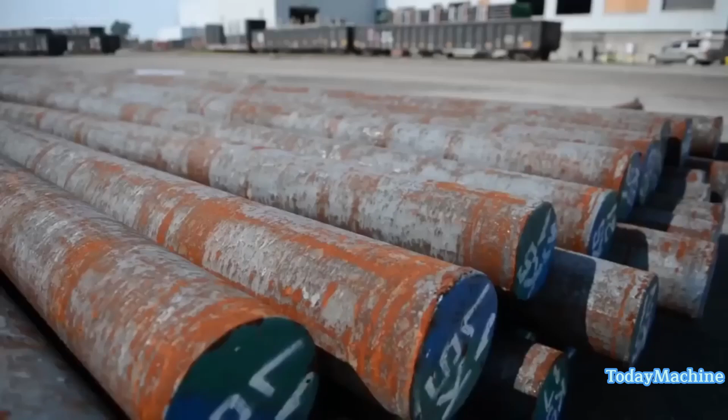The seamless manufacturing process begins with a solid steel bar that is carefully selected based on its chemical composition and desired grade of pipe. The steel bar is cut into smaller sections called billets, which are then cut into specific lengths depending on the desired dimensions of the finished pipe.

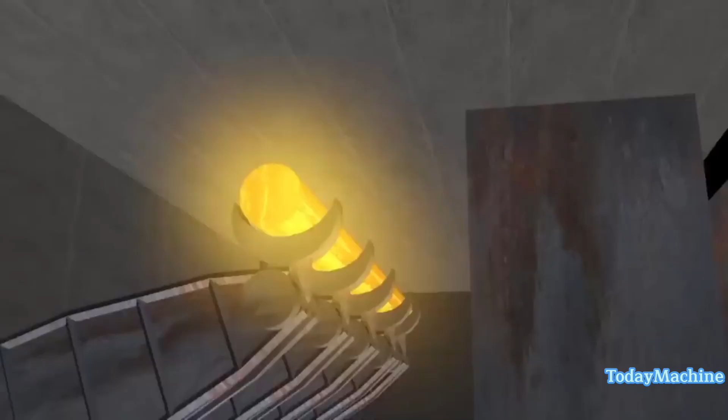The billets are transferred one at a time to a rotary hearth furnace, where they are heated to approximately 1,300 degrees Celsius. The furnace floor rotates clockwise, ensuring uniform heating of the billets. Once heated, the billets are removed from the furnace and transported to the rotary piercer.

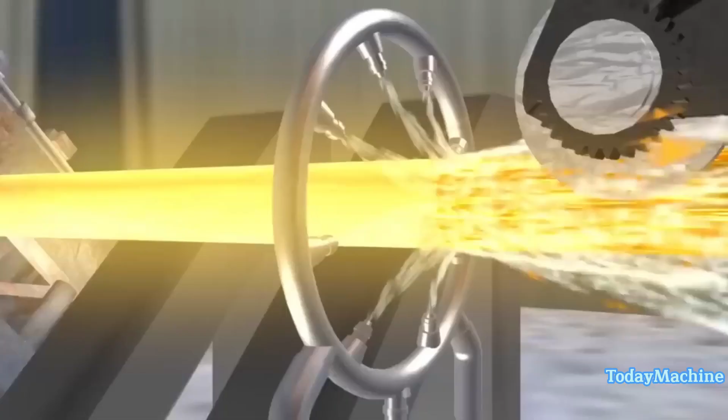At the rotary piercer, the solid round heated billet is converted into a hollow shell by cross-rolling over a high alloy piercing point. This cross-rolling action generates alternating tension and compression forces in the core of the billet, creating a void in the center as it comes into contact with the piercer point.

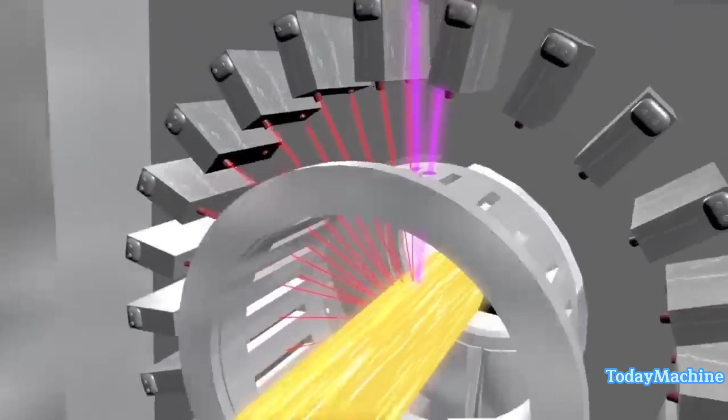The hollow shell formed at the piercer has a wall thickness that is further reduced to the final tolerance by longitudinal rolling on the retained mandrel mill. The outside diameter is rolled down by a series of 7 reduction stands using a chrome-plated tool steel mandrel. This reduction in diameter converts the heavy wall thickness of the piercer hollow into length as it passes through the mill.

After passing through the mill, a mill extractor decreases the tube's outside diameter further as it extracts the tube while the mandrel is withdrawn. The pipe then enters a wall thickness gauge, where it is scanned by 24 laser beams and 9 separate radiographic beams. These measurements provide precise outer diameter and wall thickness measurements over the length of the pipe.

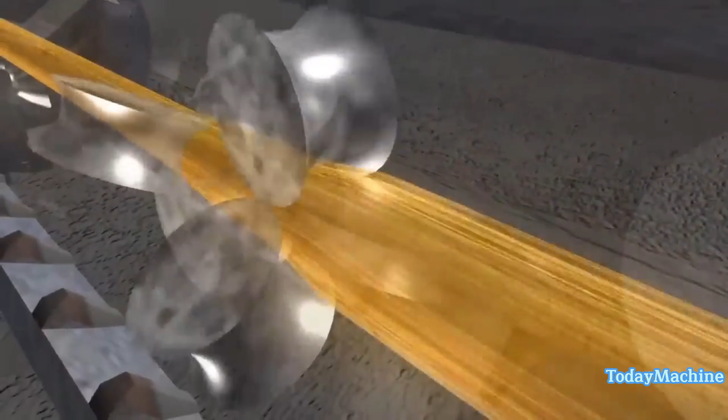The tube is then transferred to a walking beam reheat furnace for reheating before it proceeds to the stretch reducing mill. The final outside dimension of the tube is calibrated on a 22 stand mill, where 3 rolls in each stand carefully stretch the tube to create the final outside diameter.

The hot-rolled tube is discharged onto a cooling bed, where samples are cut and sent to the on-site lab for testing. Individual pipes are cooled to ambient temperature before their ends are cropped at the mill's cold saws. The pipes are then transported to the heat treatment line for quenching and tempering.

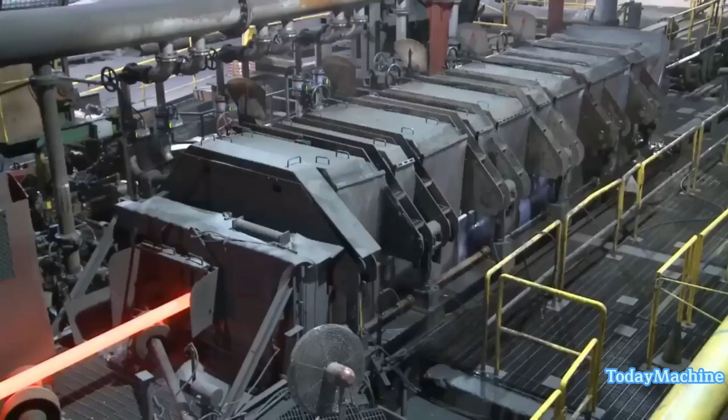In the heat treatment line, the pipes are heated to 870 degrees Celsius in a walking beam preheat and quench furnace. After reheating, the pipes pass through a water spray quench unit consisting of 7 spray quench heads with 800 individual water nozzles. The high-pressure water evenly applies the quench to the rotating pipe.

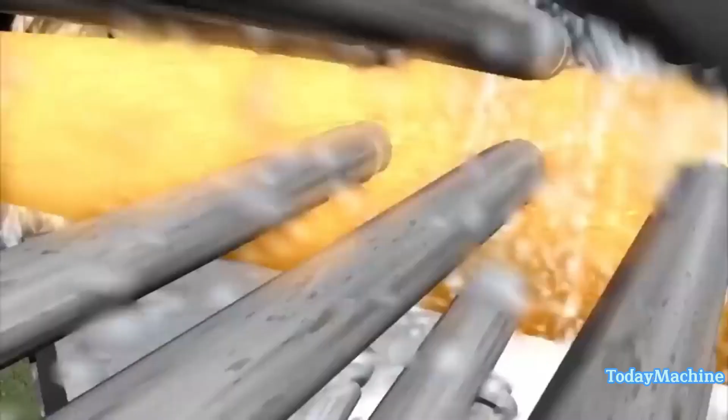Next, the pipe is transferred to a tempering furnace where it is preheated to 510 degrees Celsius and slowly cooled. This tempering process increases the pipe's ductility or toughness. Precise control of time and temperature during tempering is critical to achieving well-balanced mechanical properties in the finished pipe.

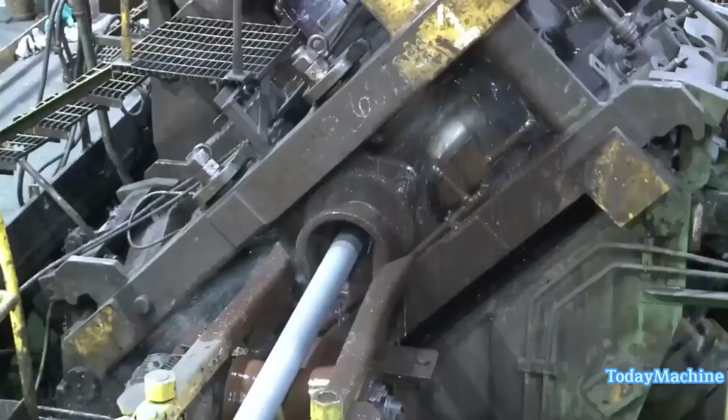After quenching and tempering, the pipe passes through a 3-stand resizing mill that calibrates the outside diameter to final tolerances. The pipe is then straightened on a rotary straightener while still hot. Samples are taken for testing of physical properties before the heat-treated and tempered pipe is transferred to a cooling bed and cooled to ambient temperature.

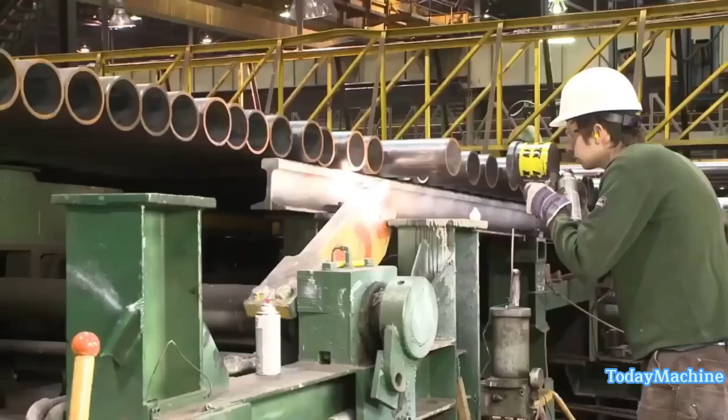The finishing process is a crucial step in the seamless steel production process. It involves various steps to ensure the pipe's dimensional accuracy, surface finish, and overall quality. First, the hollow shell formed at the piercer is further processed to reduce its wall thickness to the final tolerance. This is achieved through longitudinal extrusion on the retained mandrel mill.

The pipe's outside diameter is rolled down using a series of reduction stands equipped with chrome-plated tool steel mandrels. These reduction stands gradually decrease the pipe's diameter, converting the heavy wall thickness of the piercer hollow into length.

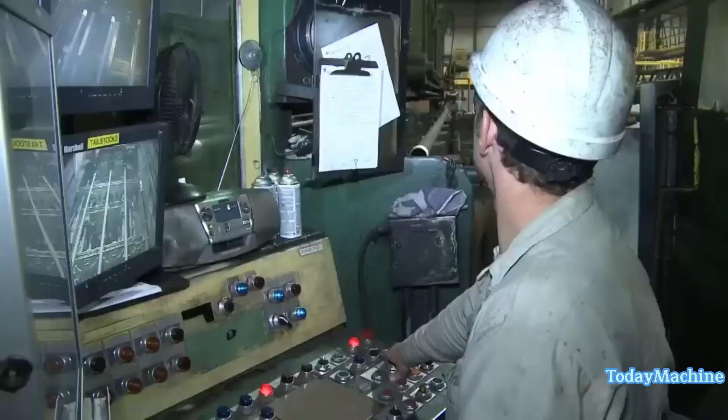Next, the pipe enters a wall thickness gauge where it undergoes meticulous scanning. Laser beams and radiographic beams are used to measure the outer diameter and wall thickness of the pipe. These measurements are critical for maintaining the desired specifications and ensuring the pipe's quality.

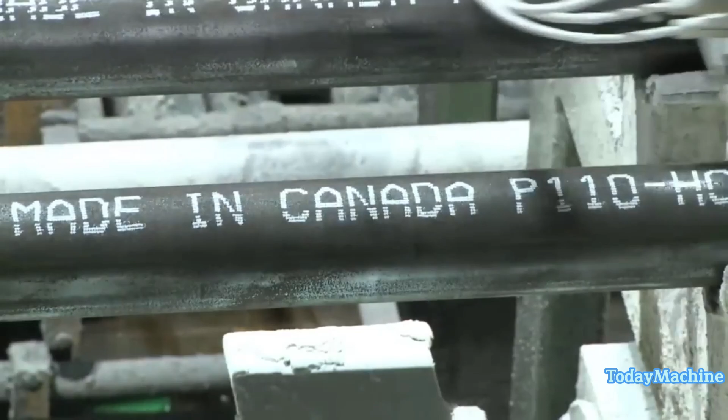After passing through the wall thickness gauge, the pipe is transferred to a walking beam reheat furnace. The furnace reheats the pipe to a specific temperature before it proceeds to the stretch-reducing mill. The stretch-reducing mill consists of several stands equipped with rolls that carefully stretch the pipe to achieve the final outside diameter. This process ensures dimensional accuracy and smooth surface finish.

Once the pipe has undergone the finishing process, it is ready for the final touch: pipe varnish. Varnishing is the application of a protective coating to the outer surface of the pipe.

Raw material selection and quality testing. Armoson emphasizes the use of alloyed steel that meets world standards. Each batch of raw material undergoes rigorous quality testing to ensure it meets the required specifications. This step is crucial to maintain the high-quality standards of their pipes.

Heating and shaping. The raw materials, in the form of billets, are heated until they reach a rubbery consistency. At this point, they undergo a complete physical shape change. This is a critical step in the production of seamless pipes, as it ensures that there are no seams or welds in the final product.

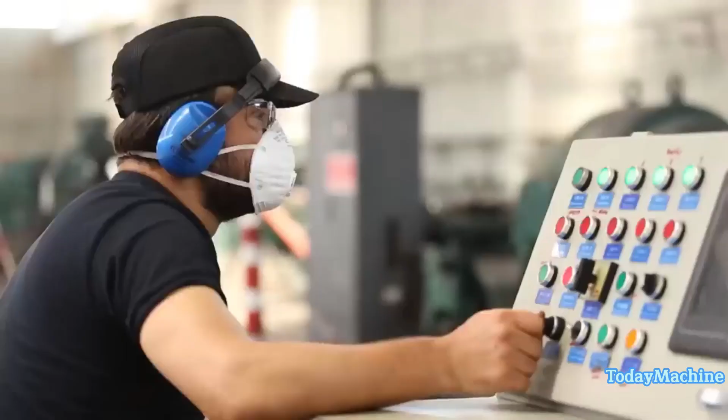Pipe drawing. The billets, after being heated and shaped, are drawn through the first and second pipe drawing units. Controlled cooling and reheating are performed during this process to maintain both the material's molecular structure and physical properties while shaping the material. This results in seamless pipes with the desired thickness.

Quality control. Throughout the production process, quality control measures are in place to ensure that the seamless pipes meet the required specifications and adhere to international standards.

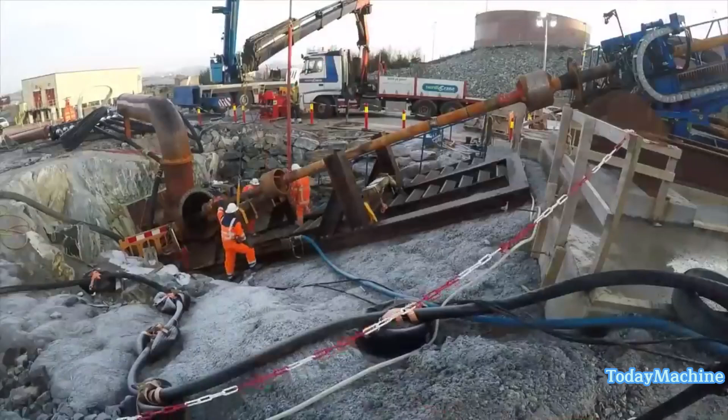The energy industry continuously pushes the boundaries of technology and engineering to extract resources from the most challenging environments. Statoil ASA, a prominent player in the oil and gas sector, embarked on a groundbreaking project in the North Sea to develop a new oil field. One of the critical components of this endeavor is the transportation of crude oil to a refinery.

This task necessitates the creation of a new pipeline, leading to the requirement of an innovative solution to connect to Statoil's refinery in Mongstad, Norway. The challenge at hand: the pipeline must traverse through extremely hard granite rocks, a feat that demanded the implementation of a horizontal directional drilling (HDD) process of unprecedented complexity.

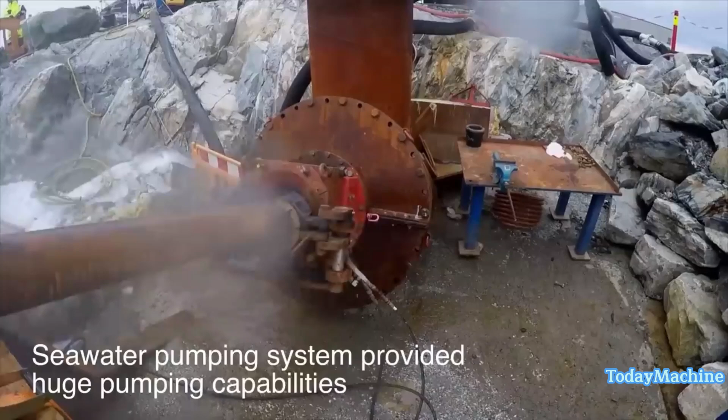In this extraordinary venture, Statoil joined forces with Visser and Smit Hanab, VSH, renowned for their expertise in complex directional drilling. Collaborating closely with the client and global experts, a formidable solution was devised to conquer the formidable granite rocks.

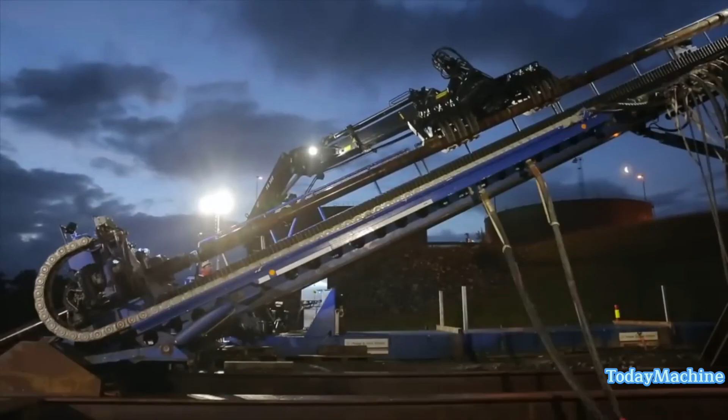Notably, Statoil and Saipem, in partnership with VNSH, engineered an offshore landing that would facilitate the installation of a substantial 92 centimeters oil pipeline. This pipeline would be pulled from a strategically positioned pipeline laying vessel stationed in Fens Fjord, ultimately connecting to the Mongstad refinery.

The intricate nature of this task led Statoil to draw upon VNSH's experience in intricate directional drilling. The fact that VNSH had successfully executed a similar project at the same location in 2007 lent them a unique advantage. In March 2016, the contract between Statoil and VNSH was inked, marking the formal initiation of a process that demanded meticulous planning, innovative design, and precise execution.

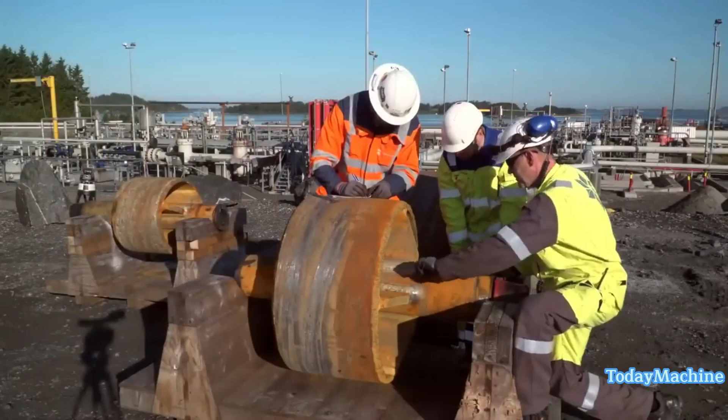The timeline of this ambitious undertaking is a testament to the dedication required for such high-stakes endeavors. The project's designing and preparatory stages spanned the entirety of the summer following the contract signing. By August 2016, the groundwork was established, paving the way for operational commencement.

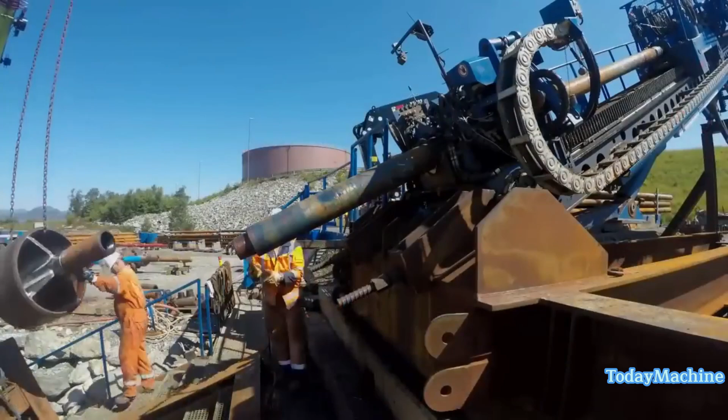In January 2017, the pilot drilling, with a diameter of 28 centimeters, was successfully accomplished. Subsequently, VNSH embarked on the initial reaming phase with a diameter of 71 centimeters. This gradual expansion of the drilling diameter was necessary to navigate the varying rock formations and layers that posed formidable challenges to predictions and strategic planning.

The Mongstad project was marked by distinctive challenges that necessitated tailored solutions. The sheer difficulty of the task was encapsulated in the steep entry angle of 24.5 degrees and the depth of the exit point at an astonishing 315 meters below sea level.

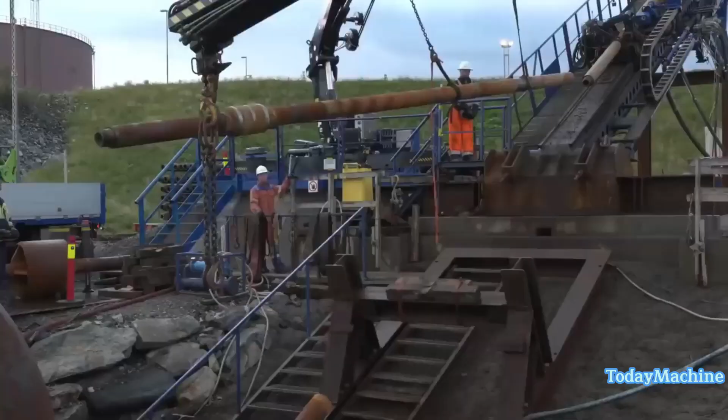Standard operating conditions for the 250-ton HDD rig dictated a maximum entry angle of 20 degrees. This divergence prompted VNSH to conceptualize and install a steel frame construction, ingeniously overcoming the entry angle discrepancy.

Delving into the depths of engineering complexity, the project faced the conundrum of operating at a depth where the pressure differentials were significant. The exit point's depth, residing at 315 meters below sea level, subjected the operation to water pressures of approximately 31 bars. Such intense pressure could lead to seawater intrusion into the borehole, resulting in cuttings flowing back and potentially obstructing the hole or even jamming the equipment.

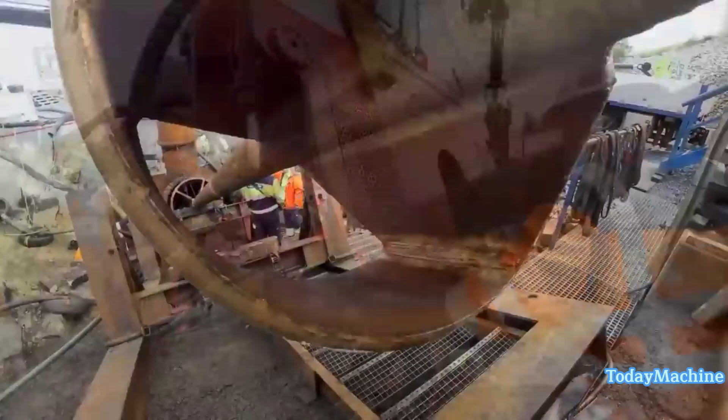VNSH devised an ingenious solution involving the installation of two massive seawater pumps, intricately interconnected through extensive piping. This system was designed to effectively flush out the cuttings from the borehole. Traditional methods for clearing boreholes proved impractical due to the exceptional water depth.

The operational strategy adopted by VNSH involved the gradual enlargement of the original hole through forward reaming conducted in three distinct stages. The diameters targeted for reaming were 71 centimeters, 97 centimeters, and 122 centimeters, sequentially. This meticulous process paved the way for the final installation of the 92 centimeters oil pipeline. The responsibility for this crucial installation lay with Saipem, commissioned by Statoil.

Undoubtedly, the Mongstad project etches its mark as a global pinnacle of technical innovation. The parameters of this undertaking were staggering, encompassing the need to navigate through exceptionally hard granite rocks with an initial strength of 250 megapascals, MPa, coupled with forward reaming activities expanding to an impressive diameter of 122 centimeters, all while spanning a total length of 800 meters. This project transcends the boundaries of conventional engineering challenges.

Remarkably, even the choice of drill pipes underwent thorough evaluation and innovative engineering. Although VNSH typically employed 7 5/8 drill pipes for their operations, the unique conditions of the Mongstad project necessitated a rethinking of this approach. The engineers at VNSH, in collaboration with global experts and the client, devised a robust solution to address potential issues of buckling and metal fatigue in these pipes.

Through thick and thin, the team operating in the rugged Norwegian terrain and unpredictable climate demonstrated exemplary dedication and tenacity. Every obstacle was met head-on, and challenges were approached with a positive spirit. The successful execution of the Mongstad project stands not only as a triumph in engineering innovation, but also as a testament to the power of collaboration, expertise, and sheer determination in conquering the most demanding frontiers of human endeavor.

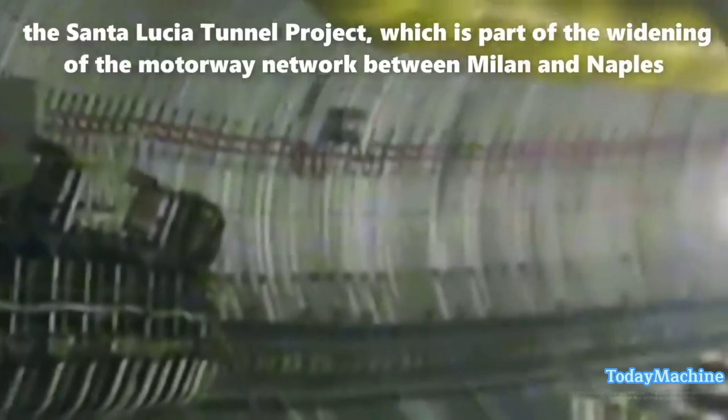CP Technology's involvement in the Santa Lucia Tunnel project began with the design and manufacturing of key components. Within an impressive time frame of just 6 months, CP Technology completed the construction of a steel-framed building, the development of lifting and handling equipment, and the centerpiece of the operation, the carousel plant. This comprehensive approach to in-house production sets the stage for a highly coordinated and efficient tunnel segment manufacturing process.

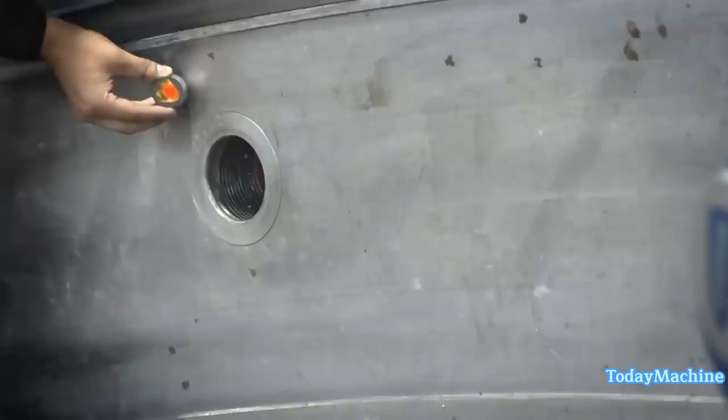One of the foundational aspects of this production process is the meticulous design of segment molds. Advanced 3D design tools are employed by the engineering team to craft these molds, ensuring not only precision but also immediate structural verification of the assembly. This design phase is critical, as it sets the stage for the subsequent stages of production.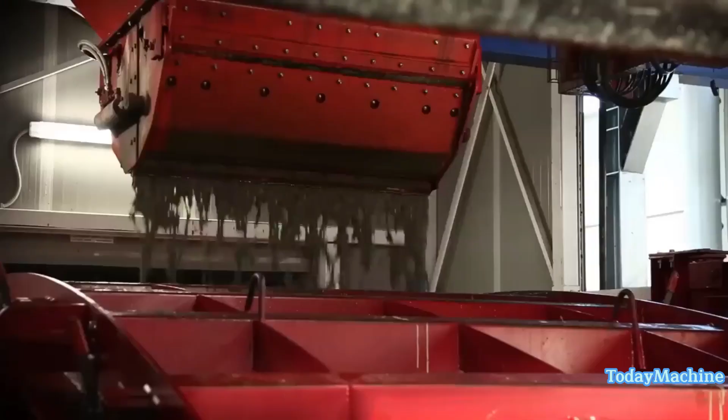Once the molds are designed, specialist engineers take charge of ensuring strict adherence to manufacturing tolerances. The use of 3D controls throughout the entire production process guarantees that each segment meets the exacting standards required for tunnel construction. This meticulous attention to detail is vital to ensure the integrity and safety of the tunnel.

The production process also involves the design and implementation of hydraulic systems tailored to the client's specifications. These systems play a crucial role in the manipulation and formation of tunnel segments, further emphasizing the tailor-made approach taken by CP Technology to meet specific project requirements.

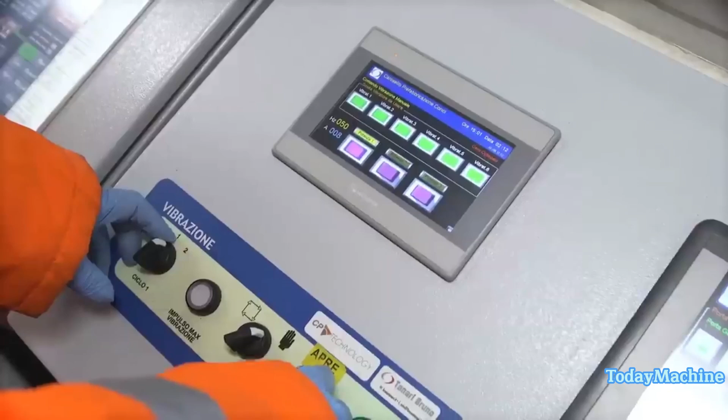CP Technology has embraced the principles of Factory 4.0, with a focus on minimizing costs and production time while enhancing safety and traceability. This forward-looking approach leverages cutting-edge technology to streamline operations, reduce waste, and optimize resource utilization. In doing so, it not only contributes to the efficiency of the production process, but also positions the company at the forefront of industry innovation.

To ensure the quality of the tunnel segments, concrete vibration is utilized during the casting process. Proper vibration is fundamental for achieving a flawless concrete finish and maximizing the amount of concrete that fills the mold during casting. CP Technology offers various vibration options, including electric with inverters or pneumatic vibration, allowing for flexibility in meeting specific project requirements.

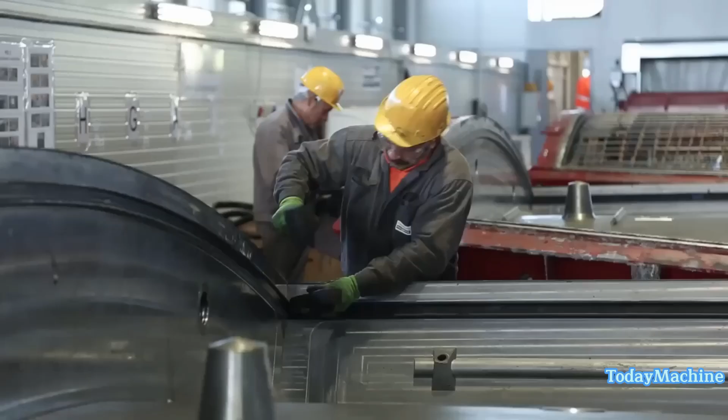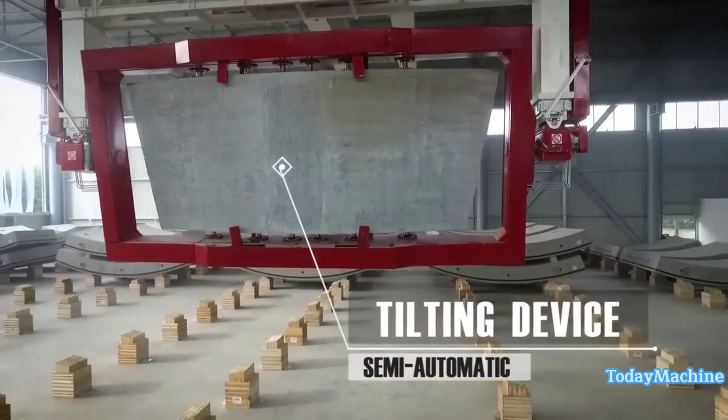Safety is paramount in the tunnel segment production process. CP Technology has implemented various safety features to protect workers and ensure smooth operations. One notable innovation is the shutter opening system, which is integrated into the mold. This system not only saves time but also enhances safety, reducing the risk of accidents and improving efficiency.

The inclusion of remote control systems, operated via smartphones or PCs, allows for real-time monitoring of production and the prompt resolution of any issues. This proactive approach to safety management ensures that potential faults are addressed as soon as they occur, minimizing downtime and delays.

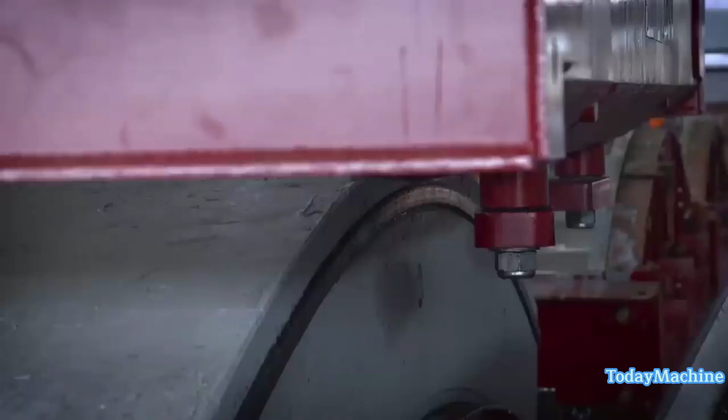The integrated segments tilting device is a pivotal element in the process. It facilitates the demolding, tilting, and transportation of segments to a pre-storage area efficiently. Safety brackets are activated during the lifting of segments, ensuring secure handling and reducing the risk of damage. Automatic positioning systems further enhance safety and precision by ensuring perfect alignment in both horizontal and vertical planes.

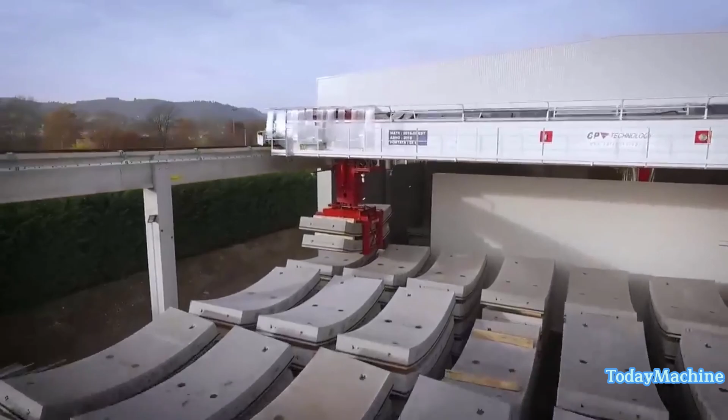This streamlined approach eliminates the need for intermediate steps, minimizing the risk of damage to segments and reducing the overall stress induced during handling. Research by renowned universities has validated the effectiveness of this system, particularly for large and slender segments.

For efficient handling and management of segments, an integrated video control system is employed. This system allows a single operator to oversee the handling of segments to the pre-storage area, improving safety conditions and cost effectiveness. The combination of advanced technology and thoughtful design considerations underscores CP Technologies' commitment to safety and efficiency.

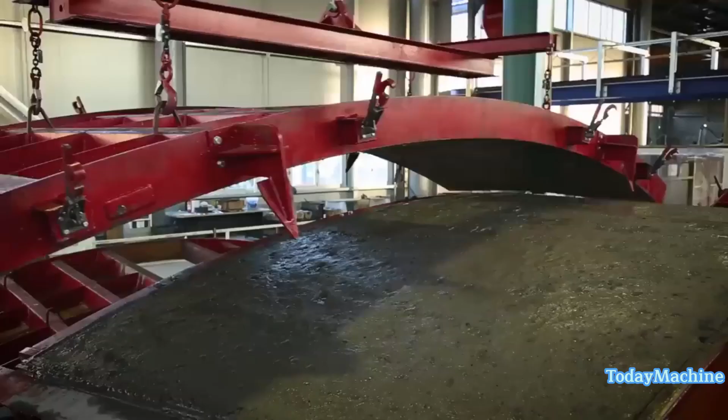With 3 decades of experience in precasting systems and a strong culture of innovation, CP Technology stands as a unique partner in the market, capable of delivering turnkey prefabrication plants with precision. Each step of the production process is subject to rigorous quality checks, ensuring that the final product meets the highest standards of excellence.

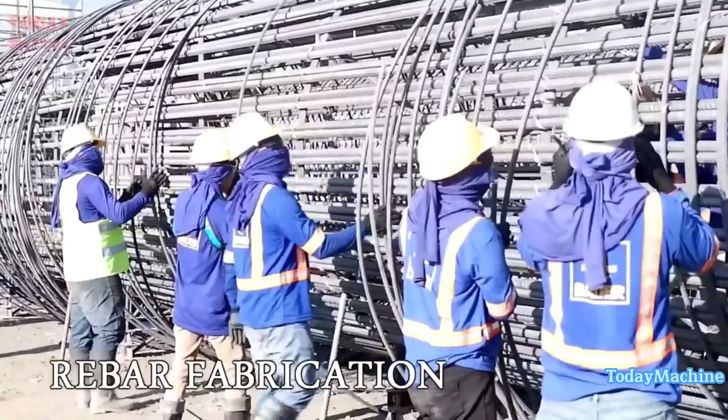The construction of a pier involves several crucial steps to ensure its structural integrity and durability. From rebar fabrication to concrete pouring, each phase contributes to the overall strength and stability of the pier. The first step in the manufacturing process of a pier is the fabrication of reinforcing bars, commonly known as rebars. Rebars are essential components that provide tensile strength to the concrete structure. They are typically made of steel and come in various sizes and shapes, depending on the design requirements.

During the rebar fabrication process, steel rods are cut, bent, and assembled according to the specified design and dimensions. This process is usually carried out in a dedicated fabrication shop equipped with specialized machinery. The rebars are bent using automated bending machines, ensuring accuracy and consistency in their shape and dimensions.

Once the rebar fabrication is completed, the construction crew proceeds to the site and initiates the excavation process. Excavation is a crucial step in the construction of a pier, as it involves the removal of soil to create a hole or trench where the pier will be built. The dimensions and depth of the excavation are determined by the design specifications and considerations of the surrounding soil.

Excavation can be accomplished using various types of equipment, depending on the scale and nature of the project. Heavy machinery such as excavators, backhoes, or other earth-moving equipment are commonly utilized. These machines have the capability to dig through the soil, remove it efficiently, and shape the excavation area according to the design requirements.

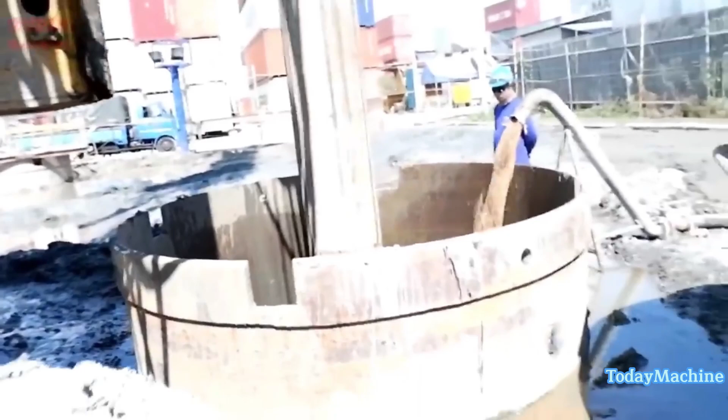During the excavation process, the soil that is removed is either stockpiled for future use or disposed of if it is deemed unsuitable for backfilling. If the soil is suitable for reuse, it may be stockpiled nearby for later use in backfilling or landscaping. This can help minimize waste and reduce the need for additional materials.

The rebars are carefully placed in accordance with the design specifications, ensuring that they are aligned correctly and positioned at the required depths. Supports or chairs are used to hold the rebars in place and maintain their proper positioning during the concrete pouring process. These supports or chairs prevent the rebars from sinking or shifting while the concrete is being poured. Proper installation of the rebars is of utmost importance for the structural strength of the pier.

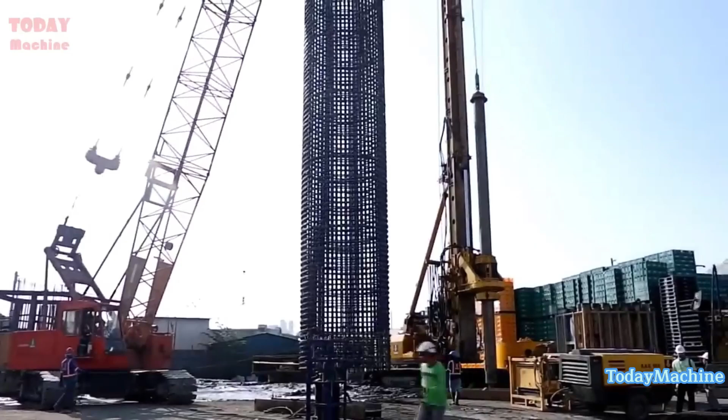The rebars provide reinforcement to the concrete, enhancing its ability to withstand tensile forces. By distributing the tensile stresses throughout the structure, the rebars help prevent cracking or failure in the pier. During the installation process, close attention is paid to the alignment and spacing of the rebars. This ensures that the reinforcement is optimally distributed throughout the pier, providing uniform strength and durability. Any deviations from the design specifications are addressed and corrected to maintain the structural integrity of the pier.

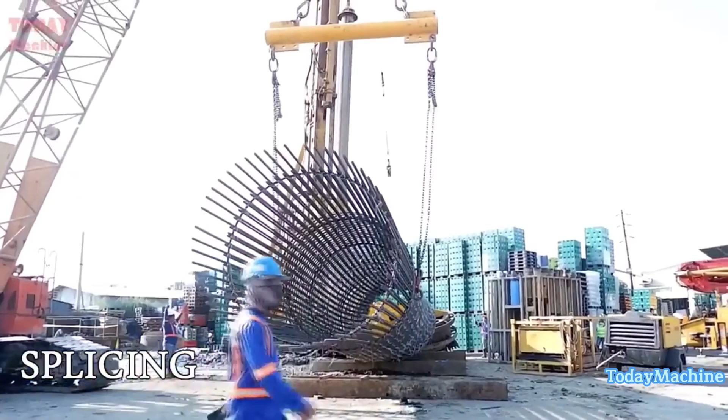For specific projects or larger diameter rebars, welded splices may be utilized. Welded splices involve the fusion of rebars using welding techniques, creating a durable and permanent connection. The choice of rebar splicing method depends on various factors, including design requirements, load considerations, construction schedule, and cost effectiveness.

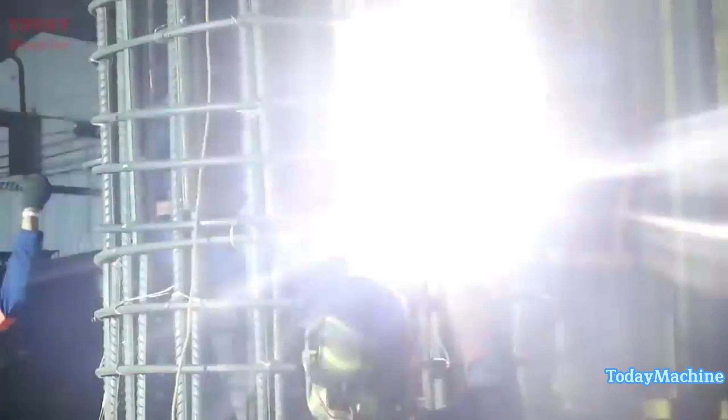Proper rebar splicing ensures that the rebars function as a unified unit, providing the necessary reinforcement throughout the entire height of the pier. It maintains the integrity and structural strength of the pier, allowing the rebars to work together in resisting applied loads and preventing potential failure points.

Quality control measures are implemented during the splicing process to verify the integrity of the splices. Inspections and tests may be conducted to assess mechanical properties such as tensile strength and load-carrying capacity. These measures ensure that the spliced rebars meet the required standards and will perform reliably throughout the pier's lifespan.

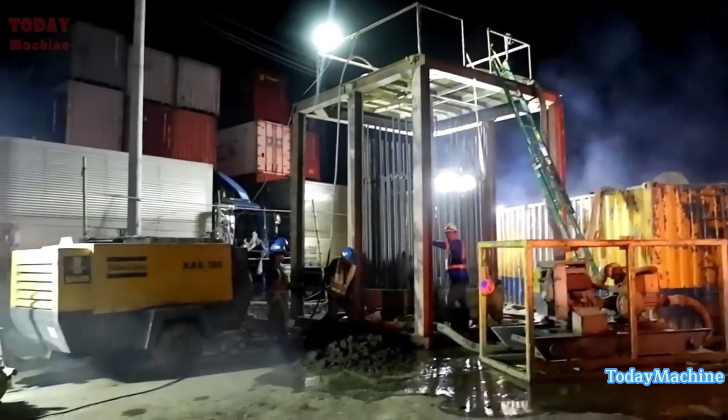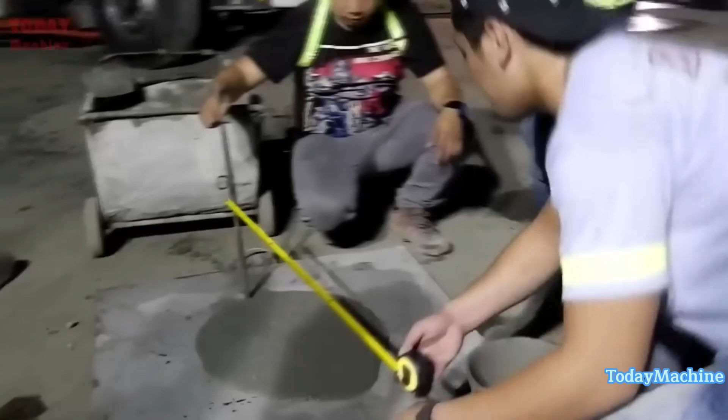Before the concrete pouring takes place, it is essential to conduct concrete testing to ensure its quality and properties. Concrete testing involves taking samples from the freshly mixed concrete and subjecting them to various tests in a laboratory. Some of the common tests conducted on concrete samples include compressive strength testing, slump testing, and air content testing. These tests provide valuable information about the concrete strength, workability, and durability, helping to ensure that it meets the required standards and specifications.

Once the concrete has undergone testing and received approval, the final step in the manufacturing process of a pier is to pour it into the excavated area. Concrete pouring requires careful coordination and expertise to ensure the uniform distribution and proper consolidation of the concrete throughout the pier.

To begin the pouring process, the concrete is transported to the construction site using specialized vehicles such as concrete mixers or pump trucks. Concrete mixers are commonly used for smaller projects, where the concrete is mixed on site and transported to the pouring location. Pump trucks, on the other hand, are employed for larger projects and allow for the direct pumping of concrete from the truck to the pour site, which can be particularly beneficial for projects with restricted access.

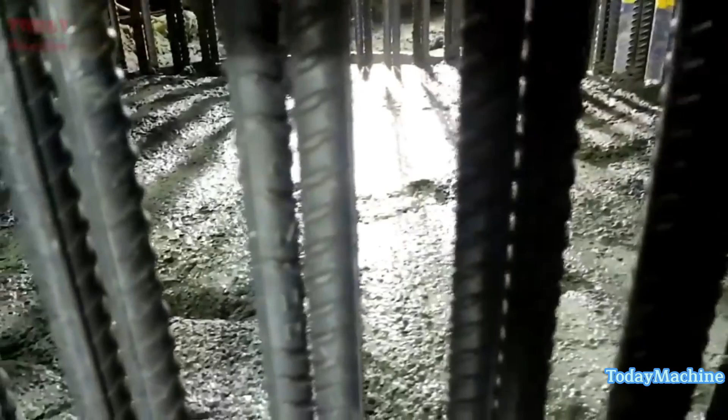Once the concrete reaches the pour site, it is discharged into the excavated area. This is typically achieved through the use of chutes, conveyors, or pumping systems, depending on the site conditions and the accessibility of the area. The concrete is carefully guided and directed to ensure it is evenly distributed throughout the pier. During the pouring process, it is crucial to maintain a consistent flow rate and avoid interruptions or delays that could lead to cold joints or weak points in the concrete.

The concrete must be properly consolidated to eliminate any voids or air pockets. This can be achieved using vibrators or other consolidation techniques, which help to ensure that the concrete is dense and free of any potential weaknesses. In addition to proper consolidation, attention is given to the finishing of the concrete surface. Finishing techniques, such as screeding, floating, and troweling, are employed to achieve the desired smoothness, texture, and levelness of the exposed concrete surface.

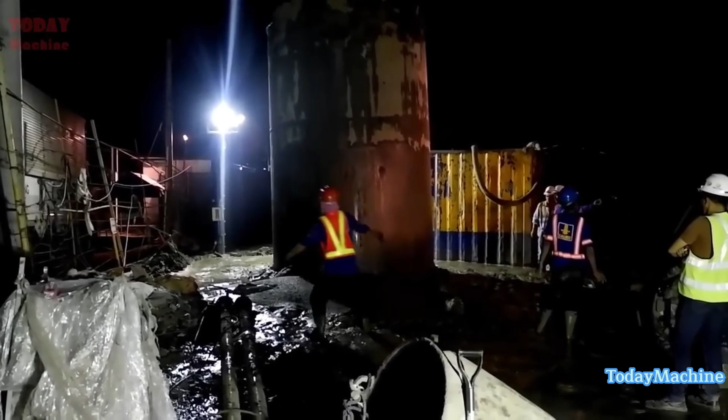After the concrete has been poured and finished, it undergoes a curing process to allow it to gain strength and achieve its intended properties. Throughout the pouring process, strict quality control measures are implemented to ensure the adherence to design specifications and construction standards. Proper concrete pouring is crucial for the overall structural integrity and longevity of the pier. It ensures that the concrete is evenly distributed, consolidated, and finished to provide the necessary strength, durability, and aesthetic qualities required for the project.

Basement excavation using bored pile technique involves several steps to ensure a stable foundation for tall buildings or industrial complexes.

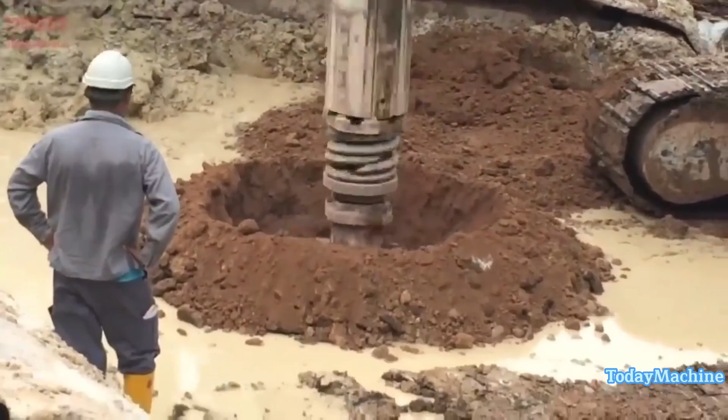In the process of basement excavation using bored pile technique, one of the initial steps is to drill a primary hole to a certain depth. This is achieved using an auger piling machine, which is specifically designed for this purpose. The primary hole is typically drilled to a depth ranging from 20 to 30 meters, depending on the specific requirements of the project.

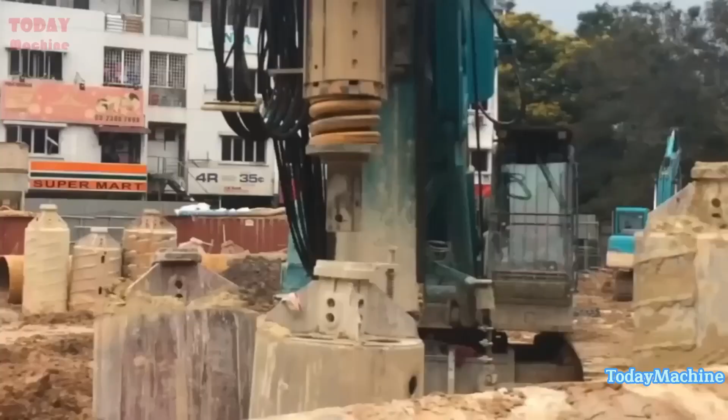Once the primary hole is drilled, a temporary steel casing is inserted into the borehole. The steel casing serves as a protective barrier to prevent the collapse of the surrounding soil during the excavation process. The diameter of the steel casing is typically 1.6 meters, providing enough space for subsequent steps of the bored pile construction.

To ensure the vertical accuracy of the steel casing, it is crucial to check its alignment during the installation process. This is done using a plumb bob, a weighted object suspended from a string. During the insertion of the steel casing, a vibrating hammer is used. The vibrating hammer is a mechanical device that applies rapid vertical vibrations to the steel casing.

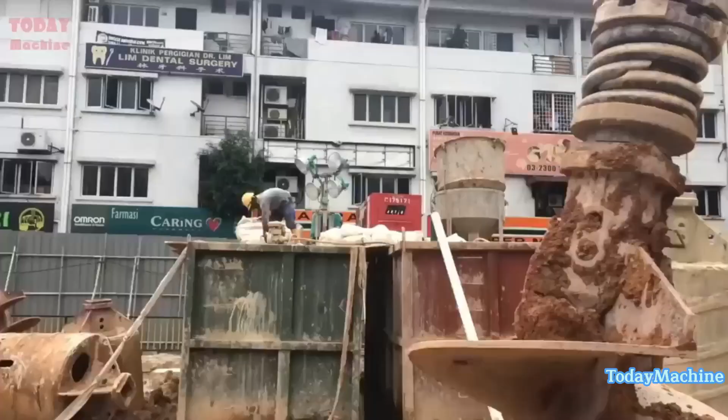The temporary steel casing provides temporary stability to the borehole during subsequent stages of the bored pile construction. It acts as a support for the surrounding soil and prevents any collapse or displacement that could compromise the integrity of the excavation. After the steel casing is in place, the hole is drilled further using a bucket to reach the required depth, which usually extends to the hard layer of soil.

Simultaneously, polymeric slurry is pumped into the hole. The polymeric slurry serves two purposes. It applies continuous pressure to the surrounding soil to prevent cave-ins, and it helps in the removal of soil during drilling. The excavated soil is disposed of off-site using trucks.

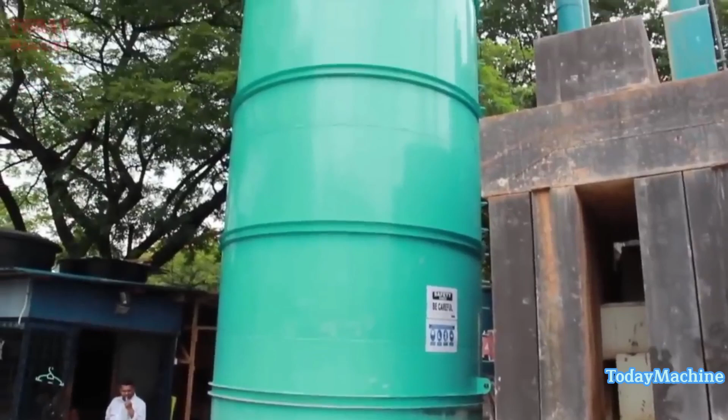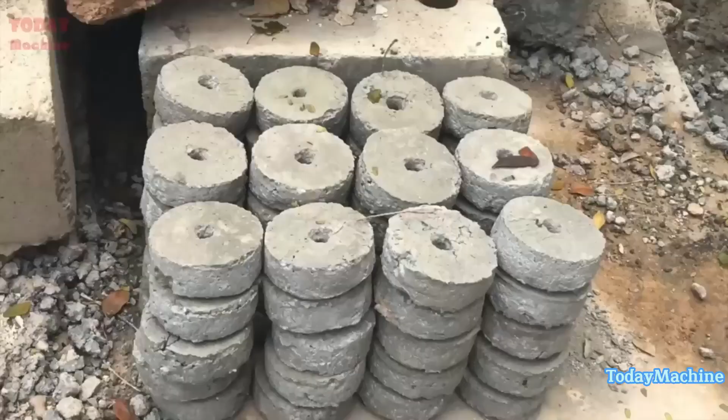Once the excavation hole has reached the desired depth, typically around 12 meters, a reinforcement steel cage is carefully inserted into the borehole. The steel cage is constructed using a combination of vertical and horizontal steel bars that are interconnected to form a rigid structure. The steel cage serves multiple purposes in the bored pile construction. Firstly, it enhances the structural integrity and load-bearing capacity of the pile by providing reinforcement against bending and shearing forces.

To ensure that the steel cage remains in position throughout the subsequent steps, it is welded to the temporary steel casing. This welding process securely attaches the cage to the casing, preventing any movement or displacement during the pouring of concrete and the removal of the casing.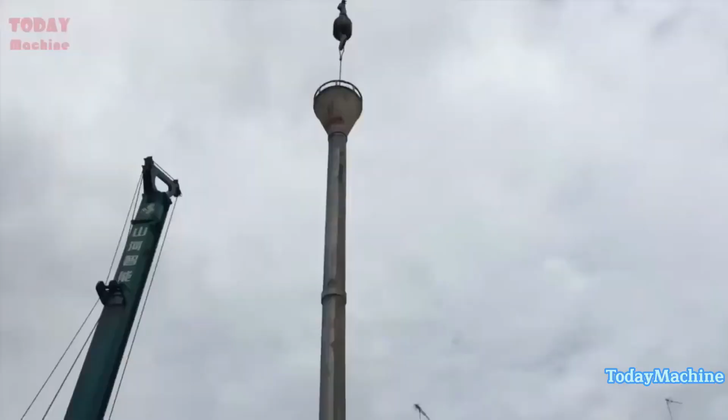The welded connection between the steel cage and the steel casing is essential to maintain the alignment and integrity of the bored pile. It ensures that the reinforcement remains in the correct position, allowing for the efficient transfer of loads from the superstructure to the foundation. By welding the steel cage to the steel casing, the construction team can ensure the stability and integrity of the reinforcement system, which is vital for the long-term performance and strength of the bored pile foundation.

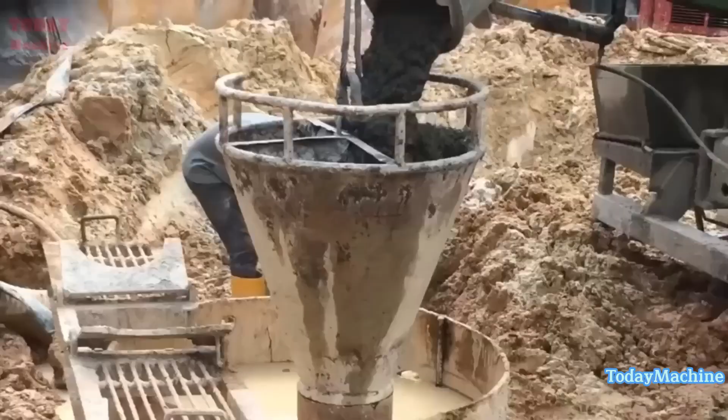After the reinforcement cage is in place, a tremie pipe is used to pour concrete into the borehole from bottom to top. The pressure forces the excess polymeric slurry to go upwards. The concrete fills the borehole, and as it hardens, it provides the necessary strength and stability to the foundation. During the concrete pouring process, the steel casing is removed, and the excess polymeric slurry is taken away by pumping for reuse in subsequent boring processes.

Once the concrete has set, the tremie pipe and steel casing are removed. The steel casing can be reused in future excavations. The borehole is backfilled with the excavated soil, and the site is cleared and cleaned.

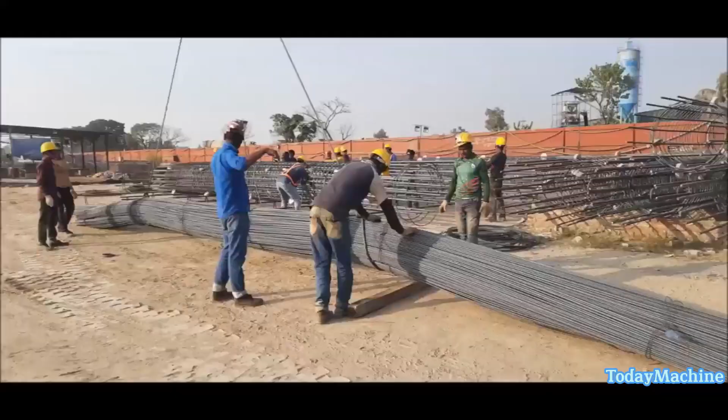Spirals are a crucial component of pile rebar cages as they provide additional reinforcement and enhance the structural integrity of the pile. The spiral making process is the first step in the manufacturing process and involves the use of specialized machinery to create tightly wound spirals from continuous steel bars.

To begin the spiral making process, a continuous steel bar is fed into the specialized machinery. The machine consists of a mandrel, which acts as a central support for the steel bar. The mandrel's diameter is determined by the desired dimensions and specifications of the spiral. As the machinery starts, the steel bar is gradually and uniformly wrapped around the mandrel.

The machine controls the rotation, speed and pitch of the spiral, ensuring precision and accuracy in its dimensions. The pitch refers to the distance between successive turns of the spiral. This control mechanism allows for consistent and standardized production of spirals.

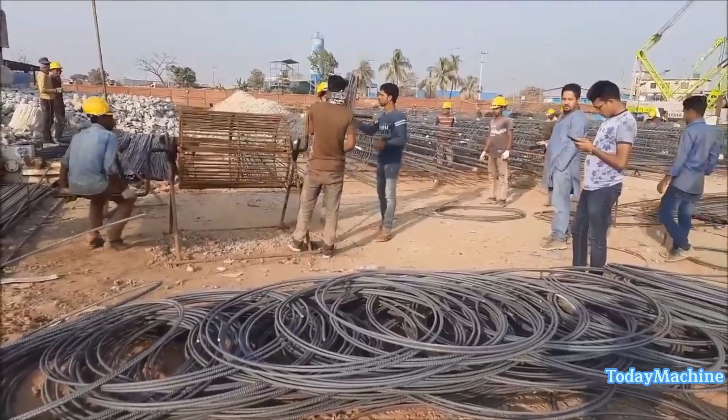The continuous rotation of the mandrel and the controlled movement of the steel bar result in a tightly wound spiral with closely spaced turns. The machinery's design and operation ensure that the spiral is securely formed and maintains its shape throughout the process.

During the spiral making process, it is essential to monitor the quality of the spirals being produced. Inspections are carried out to check for any defects, such as irregularities in the spiral shape or improper dimensions. Any discrepancies are promptly addressed to ensure the production of high-quality spirals.

Stiffeners are critical elements that add rigidity and strength to the pile rebar cage. In the manufacturing process, steel bars are cut to the appropriate lengths using cutting machines. These bars are then subjected to bending and shaping using hydraulic or mechanical benders, forming the desired configurations for the stiffeners. The bending process ensures that the stiffeners fit seamlessly within the rebar cage structure.

To create a robust cage, the stiffeners are typically welded or tied to the main reinforcement bars, reinforcing the overall stability and load-bearing capacity of the pile.

Cover blocks play a crucial role in pile rebar cage fabrication by maintaining the desired concrete cover over the reinforcement bars. These blocks serve multiple purposes, including protecting the steel bars from corrosion, providing insulation against fire, and contributing to the overall structural strength of the pile.

The cover block manufacturing process begins with the use of molds that are designed to create blocks of specific dimensions. The molds can be made of metal, plastic, or other suitable materials. The dimensions of the molds are determined based on the required cover thickness and the size of the reinforcement bars.

To create the cover blocks, concrete or composite materials are poured into the molds. The concrete mix used for cover blocks is typically formulated to provide adequate strength and durability. Special attention is given to the composition to ensure that the cover blocks exhibit the necessary properties for their intended use.

The rebar cage making process is a critical step in pile rebar cage fabrication. It involves the assembly of all the individual components, including spirals, stiffeners, and main reinforcement bars, to create a robust and structurally sound cage. To begin the rebar cage fabrication, the main reinforcement bars are placed on the assembly table in the desired configuration. The bars are carefully positioned and aligned according to the engineering specifications and design requirements. The placement of the bars ensures that they will effectively distribute loads and provide the necessary strength to the pile.

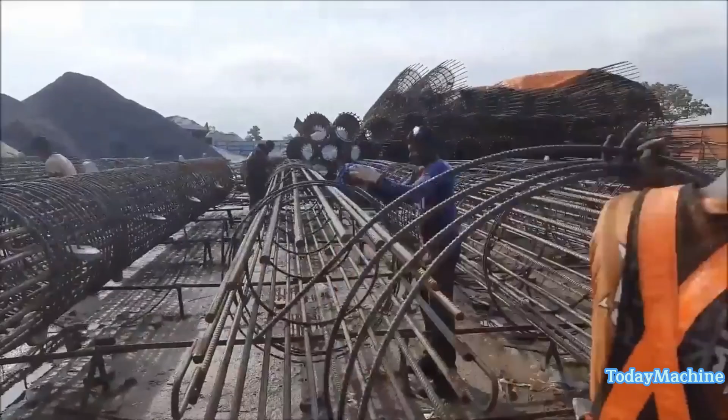Next, the spirals and stiffeners are added to the assembly. Spirals, which were made separately in the earlier stage, are positioned at predetermined intervals along the length of the cage. These spirals wrap around the main reinforcement bars, providing additional reinforcement and enhancing the cage's overall structural integrity.

Stiffeners, which were manufactured by cutting and shaping steel bars, are placed in the desired locations along the cage. Stiffeners add rigidity and strength to the cage, preventing deformation and enhancing its load-bearing capacity. They are typically positioned perpendicular to the main reinforcement bars and secured in place.

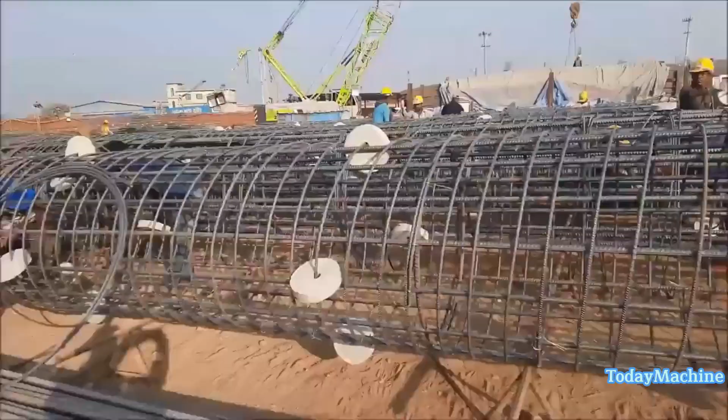The components of the rebar cage, including the main reinforcement bars, spirals, and stiffeners are securely connected to each other. This is typically done through two methods: welding and tying using steel wire. Welding involves using electric arc or gas welding techniques to fuse the individual components together. Welding ensures a strong and permanent connection between the bars, spirals, and stiffeners. Skilled welders carefully perform the welding process, ensuring proper penetration and adherence to welding standards.

Alternatively, tying using steel wire can be employed to connect the components. Steel wire is wrapped around the intersecting bars, spirals, and stiffeners, creating a tight connection. This method requires expertise in tying techniques to ensure that the connections are secure and provide sufficient reinforcement.

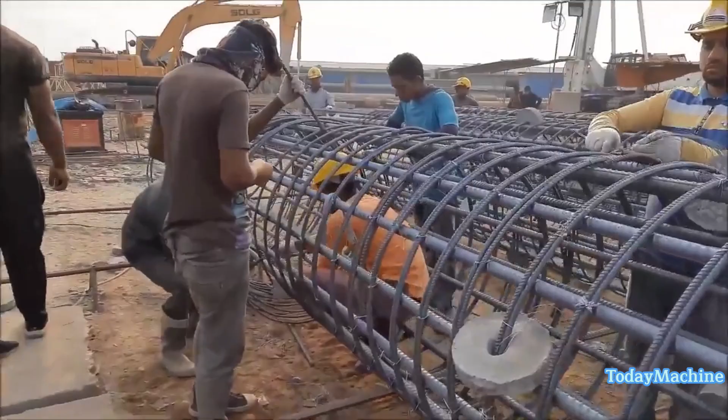Throughout the rebar cage making process, quality control measures are implemented. Inspections are conducted to verify the correct placement of components, adherence to design specifications, and the integrity of connections. Any defects or issues identified during the inspection process are rectified to ensure the production of high-quality and reliable rebar cages.

Once the rebar cage fabrication is completed, the cage is carefully handled and transferred to the rebar cage stock area for storage. This area is dedicated to organizing and storing the fabricated cages until they are ready for transportation to the construction site.

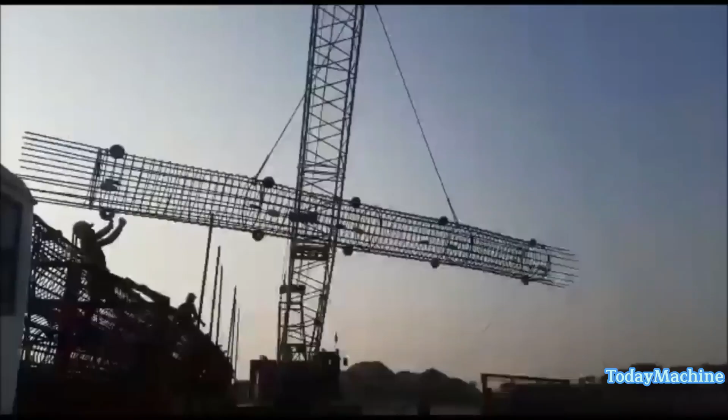Once the rebar cages are ready to be transported to the construction site, they are loaded onto trailers. This step requires specialized equipment such as cranes or forklifts to lift and position the cages onto the trailers. Care is taken to ensure proper weight distribution and secure fastening to avoid any movement or damage during transit. The cages are then transported to the construction site using trucks or trailers, ready for installation. The manufacturing process of pile rebar cage fabrication involves several meticulous steps that ensure the production of high-quality reinforcement cages.